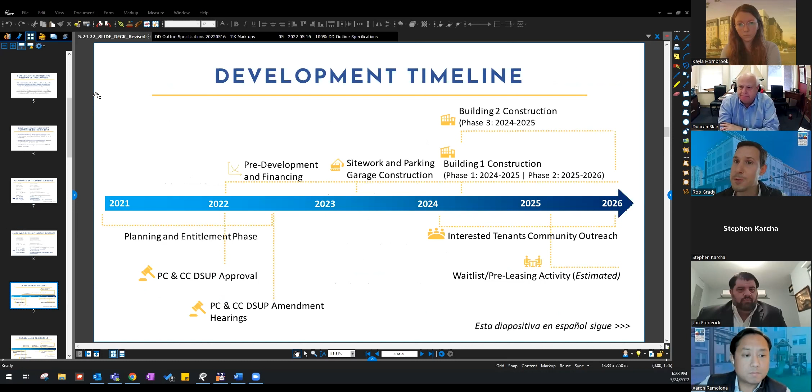Our goal for the project timeline is to maintain the same overall development schedule, with site work and construction of the garage beginning in the summer of 2023, and construction of both buildings beginning in 2024. Under this schedule, the first residential units would be ready for move-in by late 2025 or early 2026.

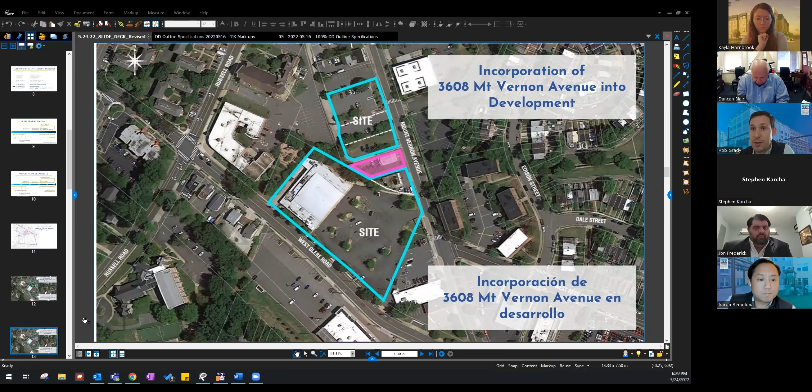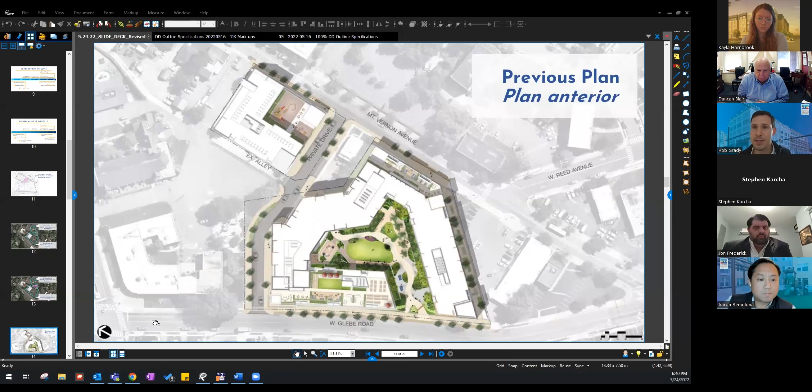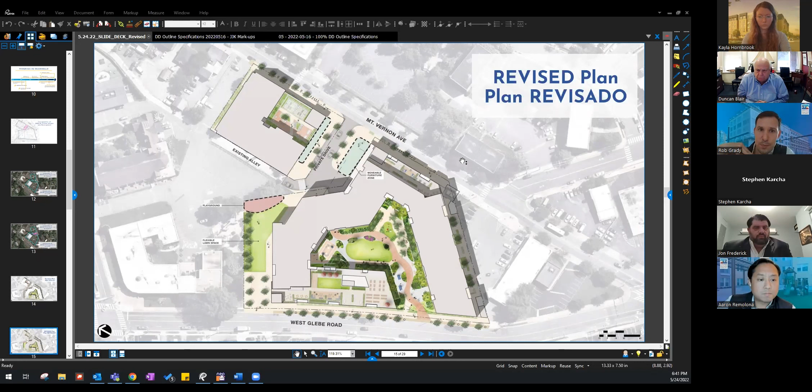Here we can see that comparison again, and you can see the lush green space and how that's really giving a nice buffer between us and our neighbors to the north, as well as the increased amount of turning area where the new expanded public alley meets Mount Vernon Avenue.

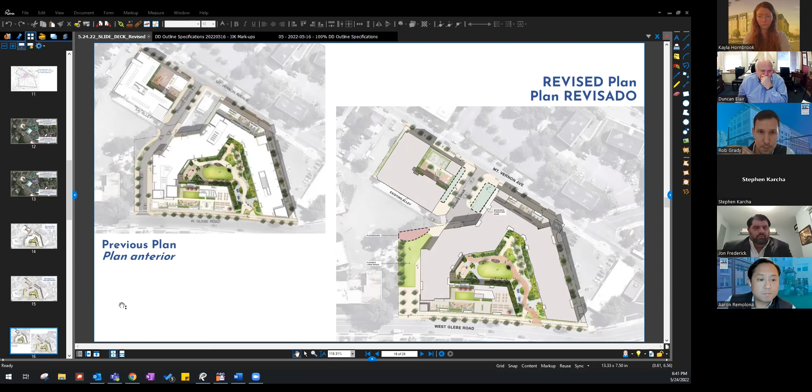So a few of the great benefits of this design revision - the major one I would say is that it is alleviating the concern about this becoming a traffic cut through on the previously proposed road.

As I've shown, the new park with a multifunctional lawn space, as well as playground amenities, are coming into this development design. There's greater connectivity with the building's courtyard.

The expanded public alley road is now centrally located within our two buildings, Building 1 and Building 2, that are being proposed. This allows for more of a plaza-like seating area and improved streetscape between the two buildings.

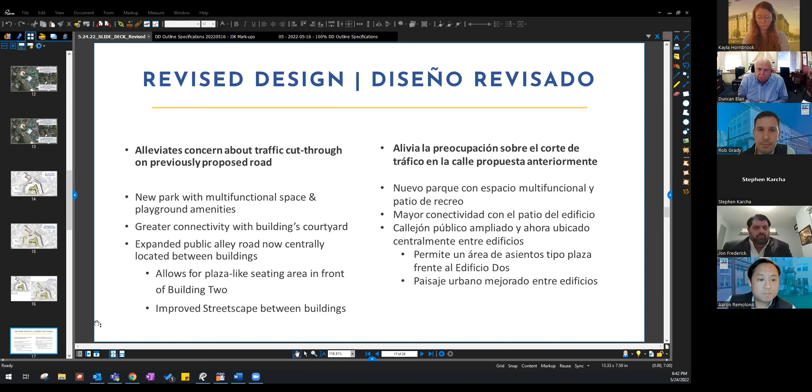One benefit of folding in 3608 is that we can now have ground floor windows wrapping the corner from Mount Vernon Avenue along the expanded public alley, creating a much more inviting area.

This addition of this parcel improves the flow between the buildings and the exterior spaces. And as I had mentioned before, it's bringing that vehicular traffic much closer to Mount Vernon Avenue.

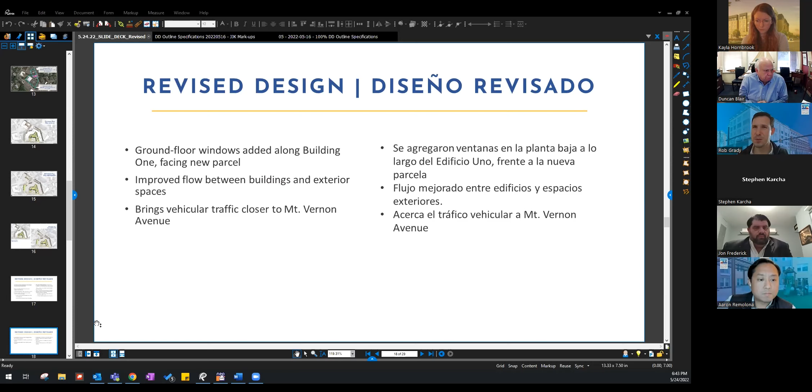So this is our revised rendering. We can see how the expanded public alley is centered between the two buildings, with ample open space and improved streetscape along both sides.

Both building lobbies really have a stronger interaction now across the site, creating a much stronger neighborhood feel within the development.

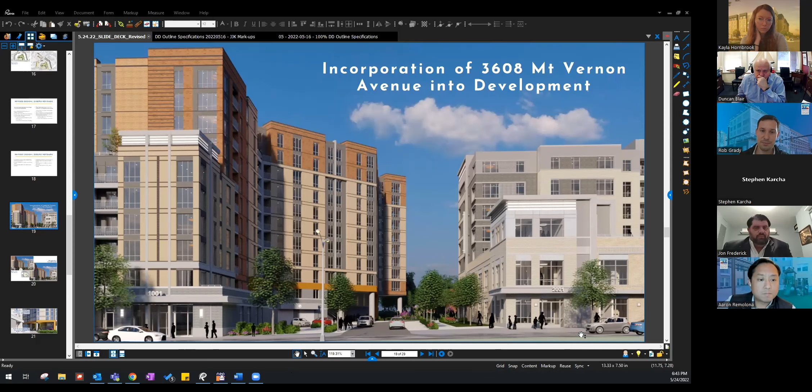Also being on the property line, we couldn't have any windows or anything like that on our residential lobby there on Mount Vernon Avenue. So it's just a much more comfortable approach to this development and a more gracious entrance for people coming into it.

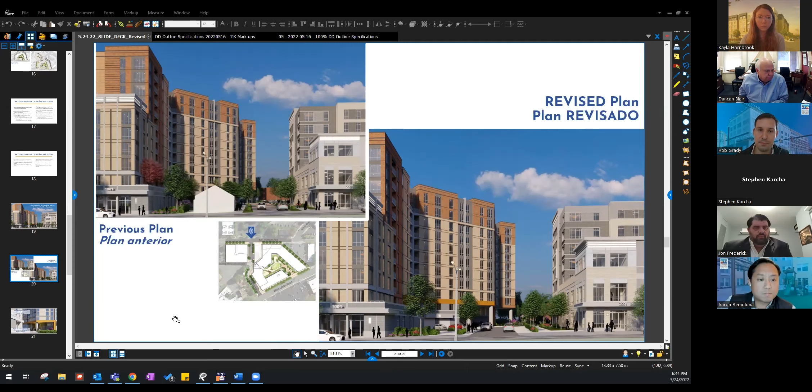This view is looking south down the public alley with building 2 immediately on the left side. You can see that the height of the central opening in building 1 has expanded for more clearance and volume.

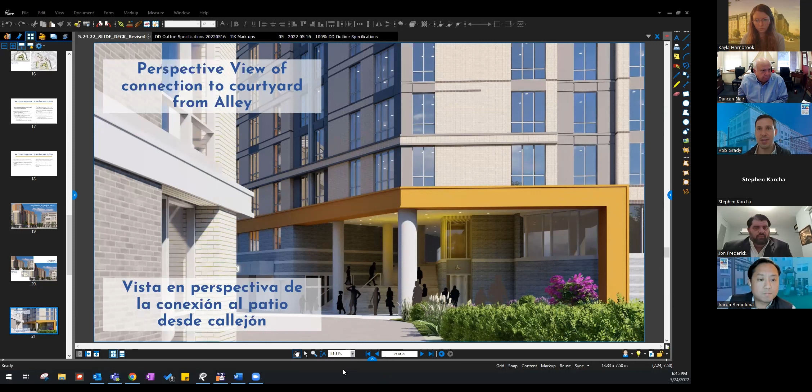The outdoor staircase has increased in size for greater connectivity between the upper courtyard park and this lower area where we also have another adjacent park. So it's a much more activated, comfortable area with interaction on the site.

And the next slide is going to show you a good comparison of where we are coming from. So here we can see how the existing garage and loading dock location within the formerly somewhat crowded design has now transformed into a more pedestrian-friendly and welcoming experience within the development.

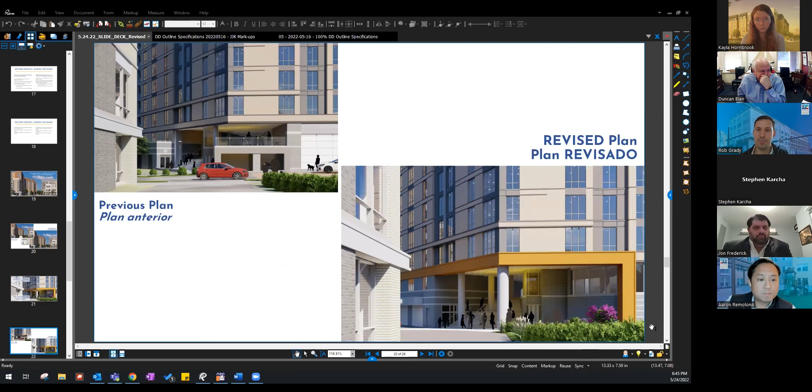In this perspective here, we can see the spacious opening between the two buildings, as well as the plaza-like seating area, which our landscape designers are working on to create a nice pedestrian feel once approaching the development.

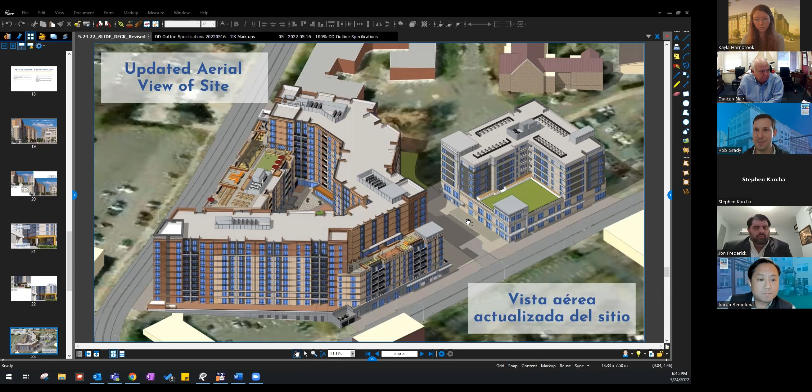In this previous plan, you can see how the former road had the loading docks and the garage entrance in the center of the development, where it was a little crowded. The road is also very much pushed up against our neighbors to the north.

In the revised design, we've removed that upper portion of the road and replaced it with a park. The goal is that this will be a multifunctional, multi-use area with a playground section, but a lot of flexibility in how it can be used. It'll also work to support the courtyard park within, giving more interaction and more outdoor space to the neighborhood.

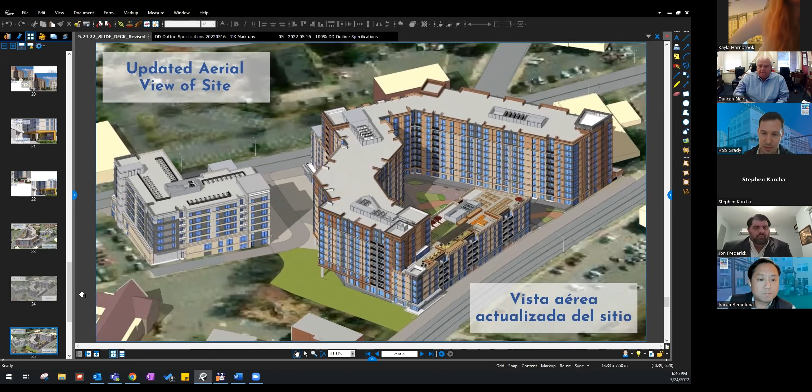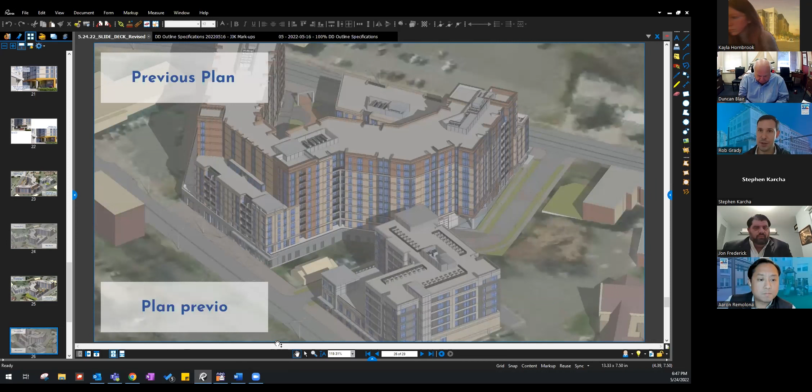In this old design, we can see where we couldn't have windows against the property line, and how the road is pushed up on one side, making it a lot tighter as you're entering this portion of the development.

In this last rendering, it really depicts the new windows along building 1. Building 1 has the garage and loading docks much closer to Mount Vernon, with much more space for turn radius and an easier way to get in and out of the site. You can also see what a large buffer the new green park area provides for separating from our northern neighbors, giving more space between our buildings.

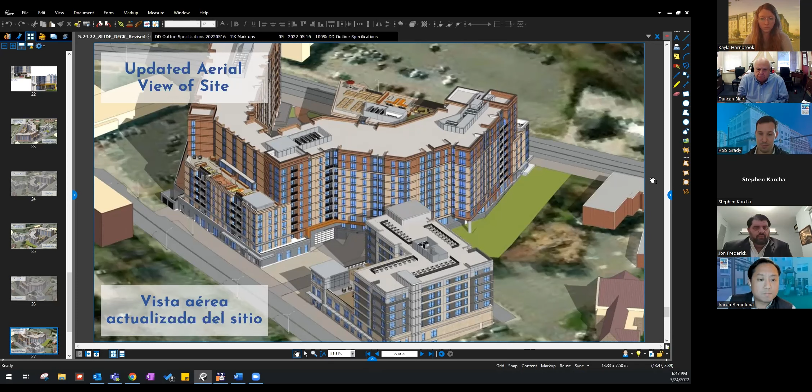This concludes our overview of the amendment to the plan. On behalf of AHDC, I want to express our appreciation for all the feedback we have received during these public meetings and during Planning Commission and City Council hearings earlier this year. We believe this feedback from the community has resulted in a much better project. Thank you again, and we'd love to take any questions on this revised design.

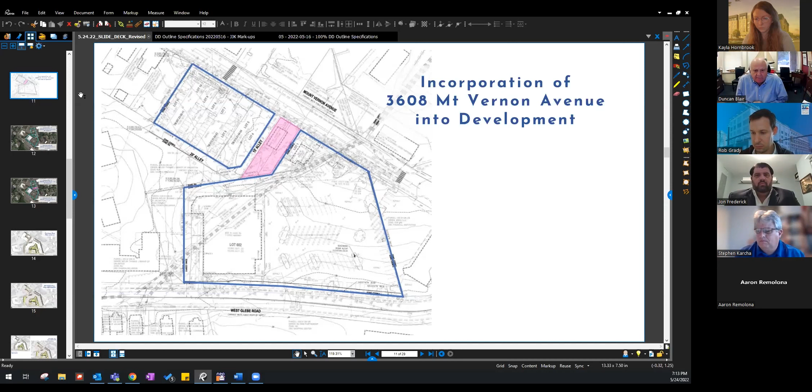Except Duncan, did you raise your hand? Yeah, I think we can end by - we talked about the dates of the hearings. I think it's important to understand that what is being requested is an amendment to the CDD concept plan, and a CDD concept plan is a broad roadmap of what will happen in the entire CDD area.

That includes our neighbors to the south, their 2 properties, and a small sliver of the church properties. We've reached out to them to see if they want to be part of how their plan could work with our plan. At this point, no one has indicated a desire to work with that plan, and we're continuing to offer.

As to the DSUP, really the modifications are what we've gone over today, and those prior approvals have been voted on by City Council, and we look for a conversation on the various amendments. But again, we have diligently and in writing tried to get our neighbors engaged in the CDD process.